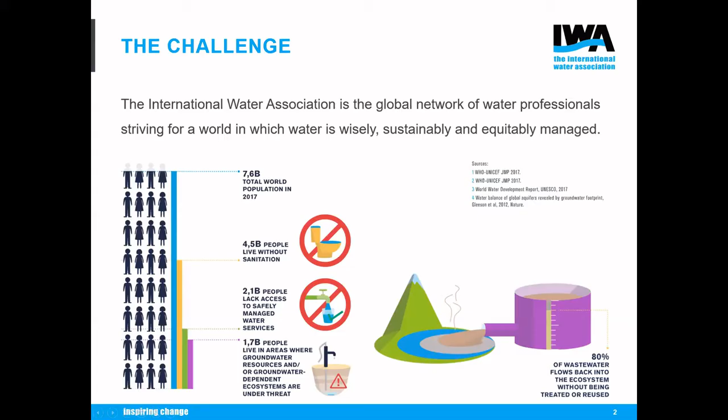Our total population is 7.6 billion. Out of that, 4.5 billion people live without sanitation, and 2.1 billion people lack safe access to water. Also, 1.7 billion people live in areas where groundwater resources are under threat. Almost 80% of the wastewater flows back into the ecosystem without being treated or reused.

That means we are polluting ourselves. So this is one thing that we all have to raise to the occasion and start doing something for water, especially the young people who are here. Please try to volunteer and join the IWA, then try to do something good with the international community.

The International Water Association is, I would say, a global water community that provides experience and leadership in transitioning to sustainable water solutions, and supports the global community to pursue sustainable development goals.

There are 17 sustainable development goals we have to achieve by 2030. In fact, IWA is a catalyst for innovation, knowledge, and best practice for the sector, external organizations, and opinion leaders. It is an international reference and source of knowledge for sustainable solutions.

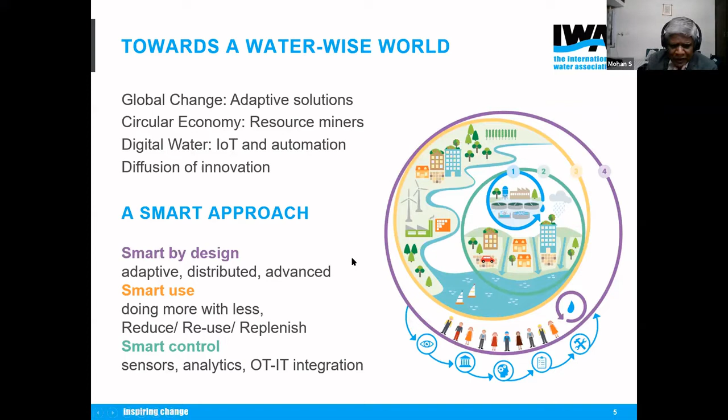So it is more about empowering water professionals to become agents of change. Engage with thought water leaders - that's the first kind of benefit any member will get. So you can connect to any water leader who is there.

There is a system called IWA Connect. If you become a member, automatically you will be connected to all the experts. Network and exchange expertise at IWA events, get the latest advancement in the water sector, guide professional development, and be part of a global like-minded community.

So that way, our slogan comes as start, engage, contribute, and lead. So you can become a member - start, then engage yourself in various activities and contribute to water management, and sometimes you may lead a particular thing.

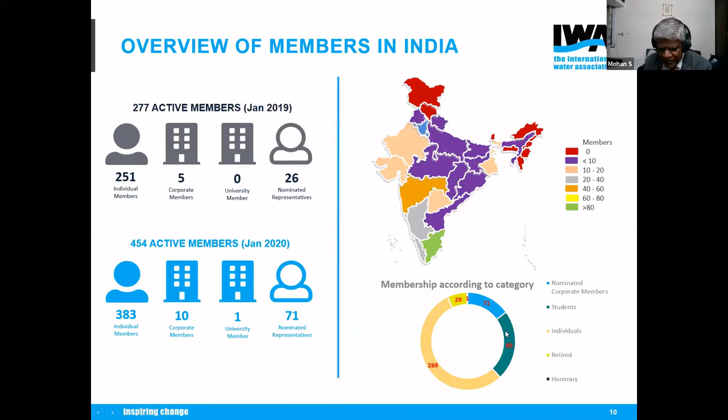This is an overview of members - some states have very good membership, some have very less. So those who are in other parts of the country should become a little more active and become members as such. There are many ways you can become a member.

The university itself, and corporates, can become members. L&T is a member, CMWSSB is a member, and so on. So we have headquarters, an executive committee, and specialized subcommittees also available.

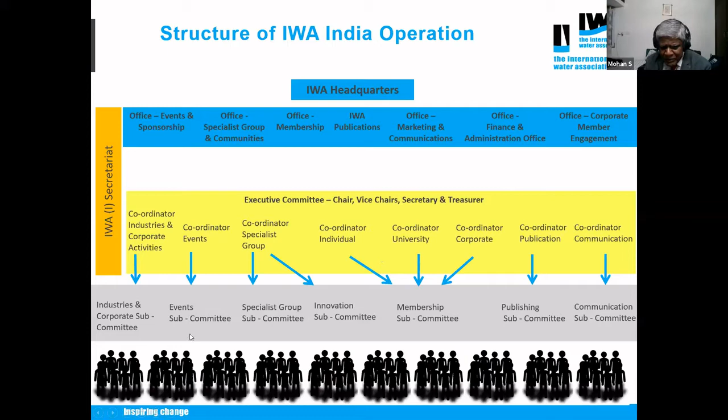So the IWA activities in India, we have a good conference in Coimbatore. Ponram has organized it, mainly on solid waste management by CSE, reimagining water use plan with IFAT, and a thematic session on digitalization. Terry madam is here, and we have also entered into some MOUs.

As on date, we have participation at different conferences, and also we have started the webinar, with more than 240 participants. The recent WDCE Water and Development Congress and Exhibition had more than 240 participants from India.

This was held in Sri Lanka, especially in Colombo, with two major sponsors, L&T and WABAG, and institutional participation from Bangladesh delegation, Nepal, and the Danish embassy. It was a very good event.

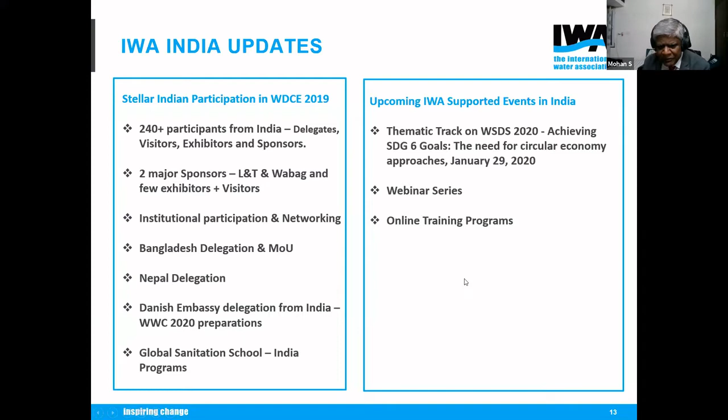We are also getting into 2020, now changed to 2021, with a webinar series and online training programs. So our main plan is membership growth.

It is not the number that we are looking at. We want everyone to join and then contribute on their own. We are only facilitating, so try to join. It is not that somebody gives you work; you yourself take initiative after joining, and automatically you can do that.

Encourage YWP India chapter formulation. Mr. Charles is working on that, along with the online webinar series. Industry-university internship opportunity is what we are trying now, and British High Commission collaboration on the water sector.

There are websites available for those who want to join. Especially I would request IWA Connect and IWA Network, IWA Publishing. There are many journals, and the Source magazine also comes out. So if you become a member, there is a chance you get some priority on publishing, unless of course the quality is very important.

With that, I will just stop here. I don't want to take time from our Jagannathan sir, but it is our duty to tell you, just to initiate, please join. There is a lot more that you can do, especially for our country and the world, on water. It is the basic elixir of life. Thank you very much for listening.

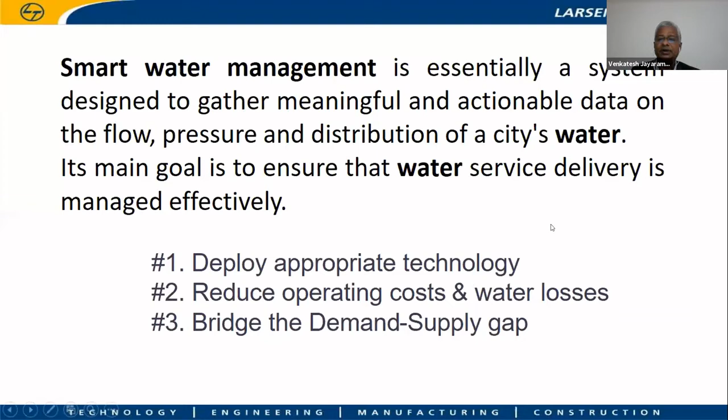So this basically has a three-pronged approach. First, deploy appropriate technology in smart water management, reduce the operating cost by increasing automation and the right kind of SCADA etc. in the system, and concurrently reduce the water losses. Finally, bridging the gap between supply and demand.

Now, if you see the presentation content, I would like to cover this in the following categories: first, a brief overview about L&T, the need for smart water management, and smart water through pressure management, leakage management, meter data management, and command and control. These are actually the methodologies, forming part of the entire gamut of smart water management. I'll be covering this in the next few slides.

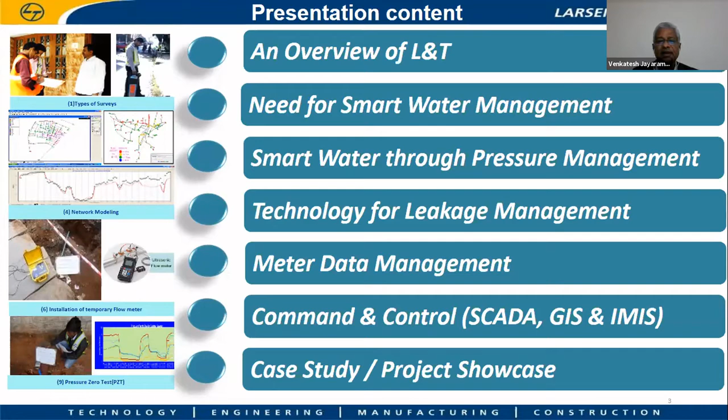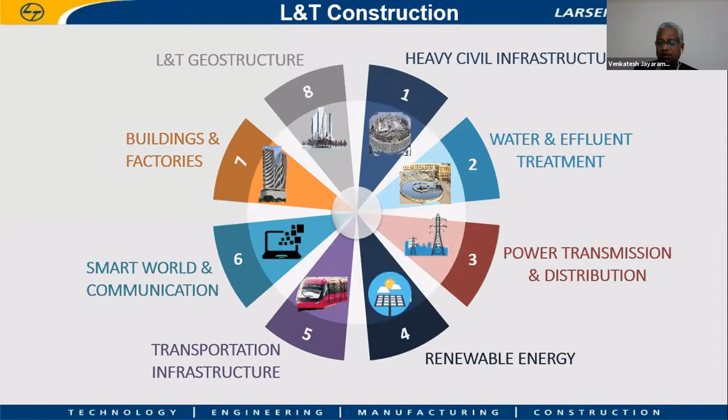This is about the further division on the water and effluent treatment IC. We have 3 major strategic business groups. Where we belong is the water and wastewater SBG, which actually executes or carries out most of these water management projects, including smart water.

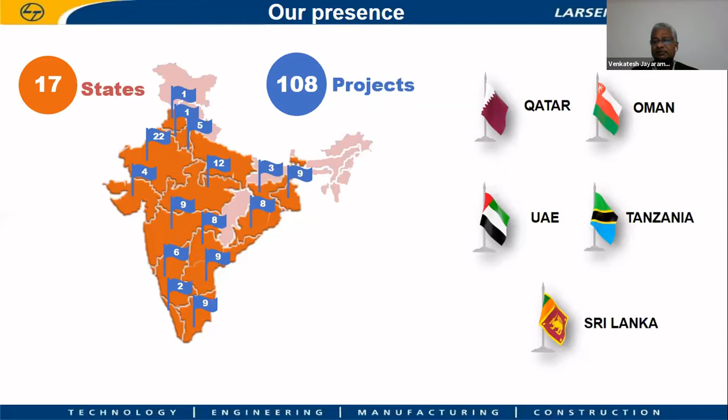One slide on our presence in various locations. We currently have about 108 projects across 17 states, and we have a presence in 5 different countries to cater to the needs of overseas markets.

I would like to specify some select references we've been working on for water management. This is the mapping of the entire component from intake to the last point of consumer metering. Currently we have the first 3 projects, Bangalore D2A, D2B, and the Delhi Jal Board project, which have been commissioned and are already completed and up and running.

The next 3 projects, Pune, Tumakuru, Hazaribagh, and Ranchi, are currently ongoing. And for the last one, we have the entire range of scope, right from intake, elevated service reservoirs, distribution, rehabilitation, giving new house service connections, then metering and billing, and also conversion from intermittent to 24/7 supply. Of course, NRW is not the least, it's the most important for any smart water management.

So out of those 3 projects, the Bangalore D2A and D2B will be presented here as one of the case studies and success stories.

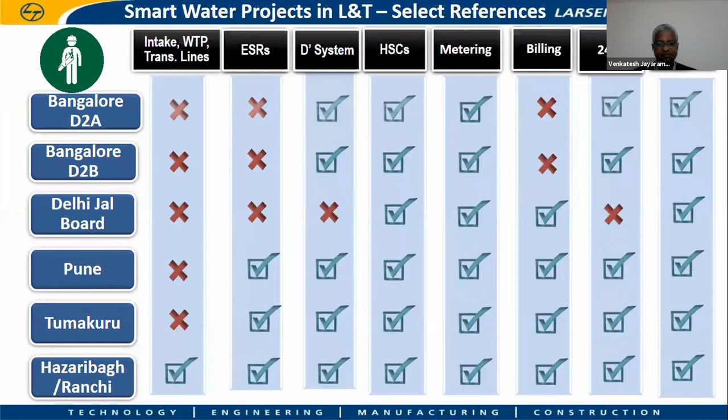The need for smart water management emanates from the fact that it's a responsibility to provide affordable, sustainable, and pure water for all. Also, this water resource is very limited and finite, and there has been exploitation of this resource in both developed and developing countries, and also an increasing gap between supply and demand.

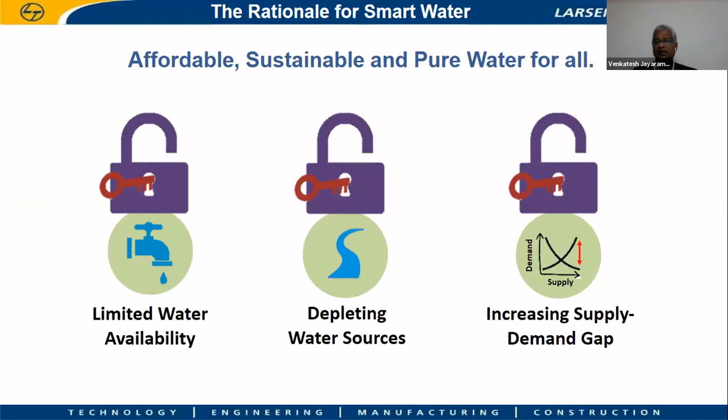If you see the current status and challenges, I'm referring to challenges in Indian conditions. I've divided this into 5 different buckets. The first, from the left, is the network part. The distribution system and networks are managed by the utilities or ULBs, urban local bodies, and most of them are done manually, with a lot of scope for interventions in automation and technology.

The second is NRW, which is a major burning issue plaguing the system. We have losses and thefts which are not benchmarked at present, and also a large quantity of water that has been lost in this particular component.

Then we also have asset management, where the data available with current utilities or whoever is managing them is not to the level desired for actually managing the system. So there is scope for improvement there also, like deploying technologies like GIS and IMIS.

The measurement component is, again, we don't have consumer metering in many cities and places at the moment. Therefore, while you can measure bulk flow meters, the consumption supplied through bulk flow meters, there isn't much scope to measure consumer metering, and therefore we are not able to assess the correct levels of NRW here.

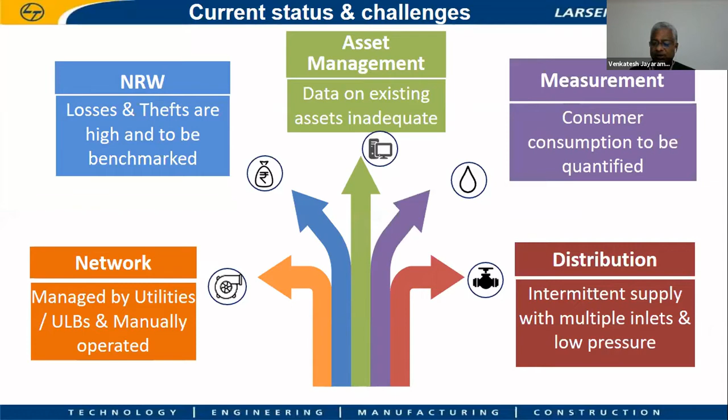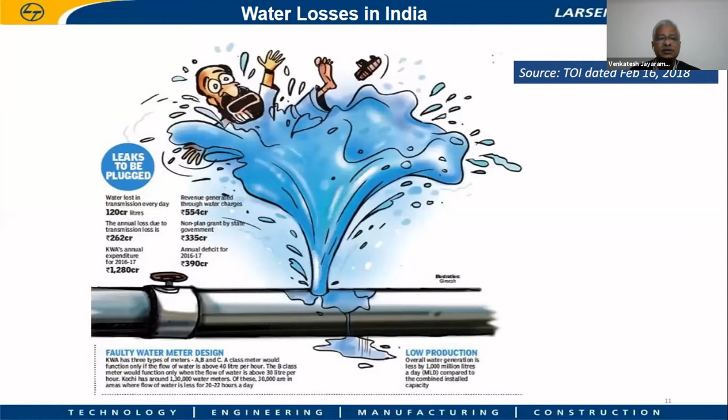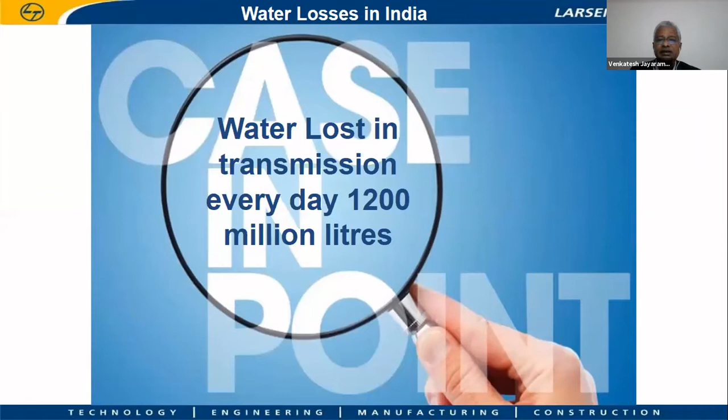An interesting statistic that I would like to share from the Times of India dated February 16, 2018. This is about the Kerala Water Authority transmission main. They have given an interesting detail about the water losses in the transmission main. This is to the tune of 1,200 million liters every day. And this, when it is converted to annual loss in the transmissions, amounts to close to around 2.62 billion Indian rupees, which is a staggering amount.

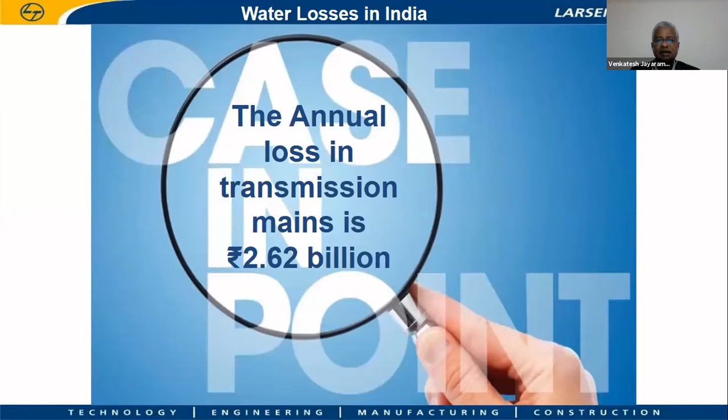And the corollary and the conclusion we can make out of this is that the annual deficit reported by the Kerala Water Authority for the year 2016-17 is to the tune of 3.9 billion. And if we manage to arrest the leakages, plug the leakages, and recover it back to the system, we would have reduced the revenue deficit by 66%, besides increased revenue by way of charging the consumers through water charges, another 5.54 billion rupees. So net, we would have made a 33% revenue increase to the utility if we plug the losses and bring it back into the system.

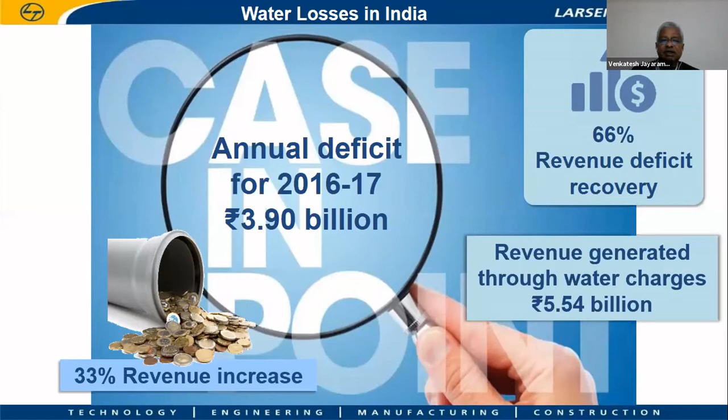When it comes to the global scenario on non-revenue water levels, there is an interesting study done by the World Bank, and this has been displayed here. Germany, Japan, South Africa, they are all well within the 10% advanced limits. But if you see India, we have a staggering 46% of losses in the system. These are physical and commercial, also apparent losses. And out of this, it is interesting to note that 32% is due to pilferage or thefts.

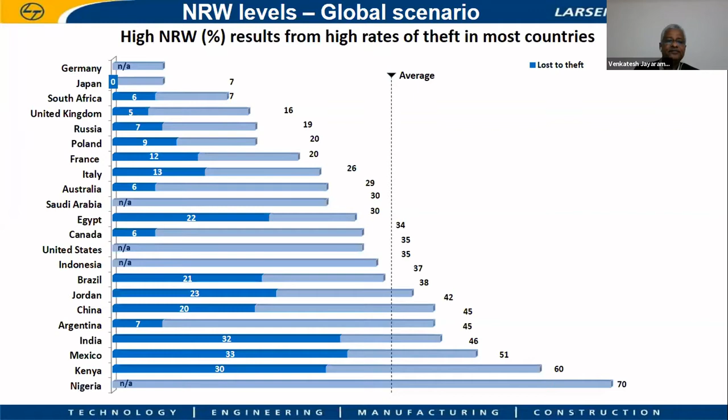And just to give a snapshot of the service level benchmarks specified by the Ministry of Urban Development, they have categorized the service levels into 7 different parameters. The first one is efficiency in collection of water charges, which has to be at 90%. 100% cost recovery from water services so that it can take care of the O&M part. 100% metering for all the connections, consumer connections and the bulk connections.

Coverage of water supply has to be 100% to all the consumers. And then non-revenue water has to be contained within 20%, which is a major challenge. And then we have the per capita supply to be given at 135 LPCD. And 100% of the water quality samples taken have to conform to BIS 10500 standards.

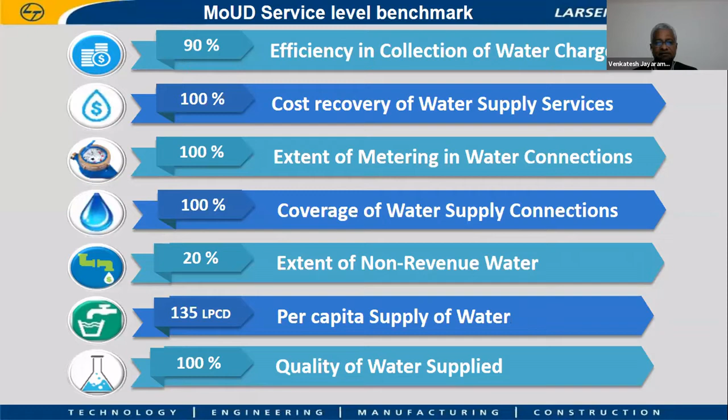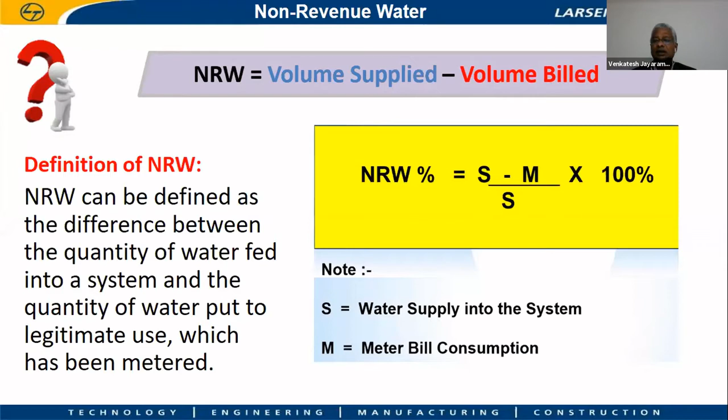Just to give an idea about non-revenue water, the definition says that it is the difference between the quantity of water supplied vis-a-vis the quantity of water consumed. And the percentage of NRW is calculated by this formula, and it is measured as a percentage of the whole.

Here again, I just wanted to touch upon some of the salient aspects of non-revenue water, at what points of the value chain of the water supply system it is disseminated. It starts right from the treatment works to the last point of billing. In treatment, again, there are losses in the system, in the filter beds, in the flocculators and all these components inside the water treatment.

And along the raw water and clear water transmission system from treatment to the service storage reservoirs, you again have illegal tapping, unrecorded users, and also losses in the transmission main, which are not so much as compared to the distribution system. The distribution system is the main part where you find much of the losses happening. You have many components, mains, HSC joints, then you have leaky valves and the likes of that.

And again, in the metering, you have losses due to errors in the meter reading, tampering of meters, illegal connections, faulty meters, and also bypass to meters. I'll be showing some of the pictures that we have taken during some of our projects that we've been implementing, and that would actually throw some eye openers on the quantum of water that has been lost due to this aspect. And of course, the last point is on the billing, where administrative errors, data computational errors, and loss of records also contribute to non-revenue water.

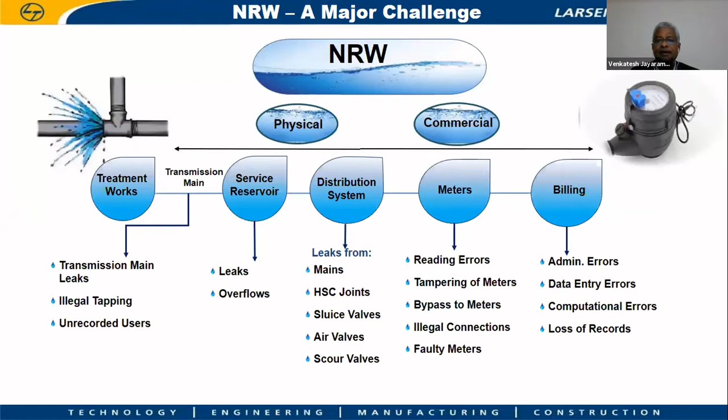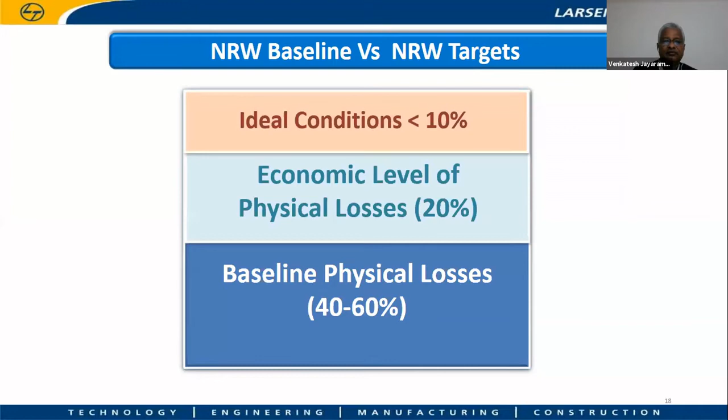NRW baseline versus targets. If you see the baseline physical losses, we would like to have it at economic levels of 20% as defined by MOUD. But where we would like to be, at ideal conditions, would be at less than 10%. But for this, we need to deploy a lot of technology, a lot of instrumentation at the projects, at the utility, to bring it down to this level. So if the cost becomes a little prohibitive, then for Indian conditions, we would like to have it at 20% physical losses.

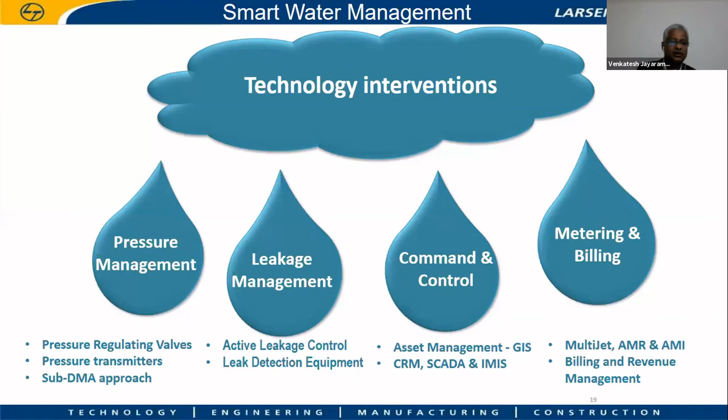Now, technology interventions are something that contributes to smart water management. Without technology, there is of course decision making and all the support systems, but technology is a main driver where smart water management is made effective and efficient at the ground level. Out of our experience in L&T and many of the projects that I've handled, there are four main components: pressure management, leakage management, command and control, and metering and billing. If all four are holistically approached, this helps in bringing down the losses or deficiencies in the system and contributes to smart water. I'll be dwelling upon each of these in the next few slides, so I'm not describing the text mentioned at the bottom.

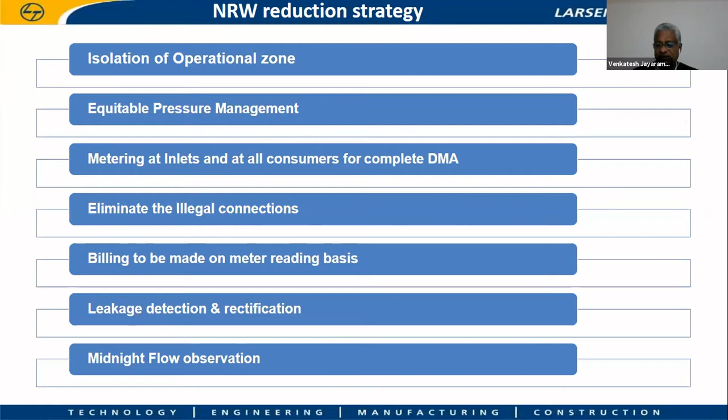The first one is on equitable pressure management. The main thing about pressure management is using the right kind of sensors, pressure transmitters at critical measuring points. Typically, these are anywhere between 3 to 8 or 10 points within the DMA. If this is not there, it becomes difficult for us to manage the pressure. One has to be at the outlet of the elevated storage reservoir, one at the farthest point of the DMA, and one at the highest elevation point in the DMA. Besides this, we can have the luxury of many more, depending on the budget available and the permissions given inside the system.

The second one is on pressure management. These are typically done using PRVs. There are two types of PRVs here: one is hydraulic, the second one is electronic. With hydraulic PRVs, we have set points at the inlet and outlet of the valve, and using this system we'll be able to control the pressure downstream. There is also a concept of pressure on demand. Based on the demand of the consumer at that particular sub-DMA or street where the pressure has to be managed, we can set the demand pressure levels for that given demand and then manage that.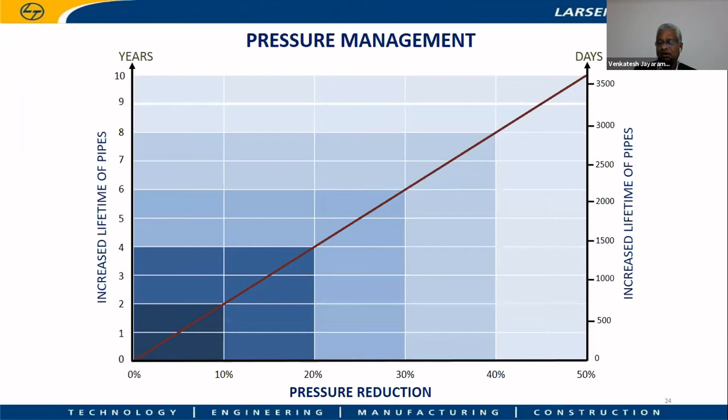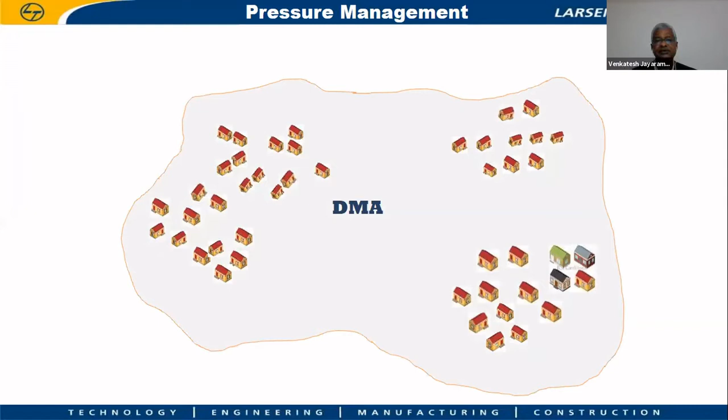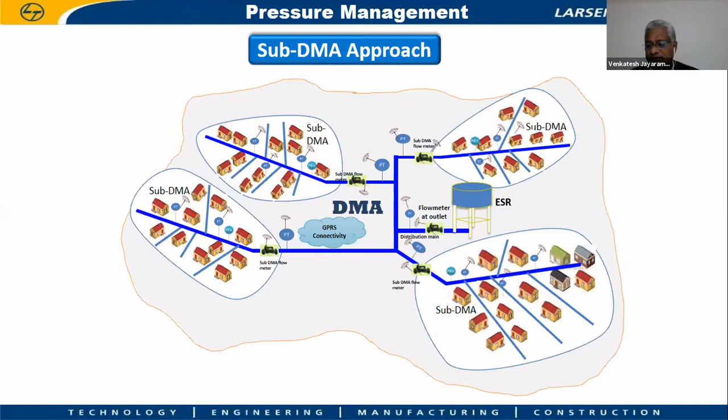The next one is on pressure management using the DMA concept. We all know that DMA is helping us in understanding the system better, where the losses are, and managing the system more efficiently. But if there is a sub-DMA concept with more pressure sensors within the sub-DMAs, it becomes easier to handle, because we are breaking it down into smaller components and managing it more easily and effectively. Of course, there are more sensors to be deployed here, and we can look at each of these on a case-to-case basis for our projects.

Then leakage management is the second one. Just to give a brief on the procedure for leakage management that we've been adopting at L&T. We have DMAs that are typically, as per the norms established by IWA, anywhere between 1,000 to 2,500 connections, also depending on the topography of the area. We do a condition assessment of the pipelines to ensure that the joints are all intact, or how bad or good the joints are. Plus, we also do a vulnerability analysis to map the hotspots and make a template for pipe replacements.

The next one would be installing the required bulk flow meters and consumer meters, because we have to measure the entire volume flowing into the system and the volume that has been consumed. Then installing pressure sensors at critical measuring points to manage the pressure and also see if there are any discrepancies with respect to the designs, the ideal conditions that we have from the hydraulic model.

Then we have the minimum night flow, which is done if there is a continuous flow, but if there's intermittent flow, this has to be looked into again. Using that, we calculate the net night flow. If the night flow is higher than the permissible levels, then we do a step test, pinpoint the leakages, and finally we rectify the leakage.

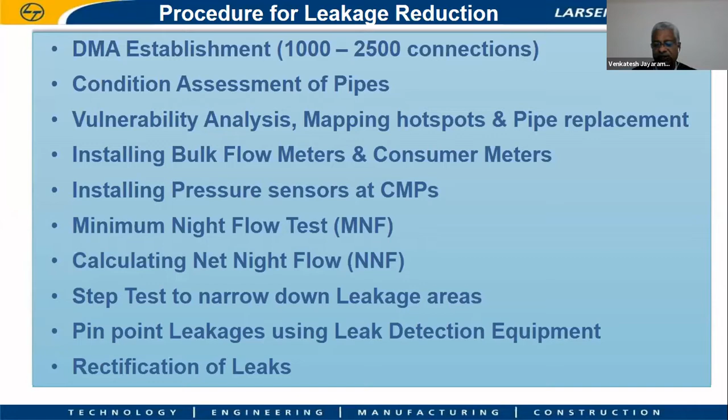The next aspect is the condition assessment of existing pipelines, because this contributes to leakages a lot. We have some technologies that we have explored, and currently some of them are under pilot POCs in a couple of our projects. Pressure transient analysis can be done. This is typically done upstream and downstream of the valve, because when you close and open the valve, a transient wave is generated across the pipeline downstream, and this can help in assessing the condition of the pipe. If there is any change in the signature of the pressure transient waves, we'll be able to assess that something unusual is happening downstream.

Then we have the images, the inline robotics, the smart ball, and some of the crawlers that go into the system. It's basically camera based, it generates images, and we can monitor the C value or the leakages or the damages inside the pipeline. But this again has its own limitation, because it goes through a cable inside the pipeline, and the diameter also poses a problem. We have seen that this cannot be deployed to pipelines which are less than 200 mm in diameter. So for larger diameter pipelines this can be deployed, but the constraint is on the smaller ones, which are the majority in most of our distribution systems.

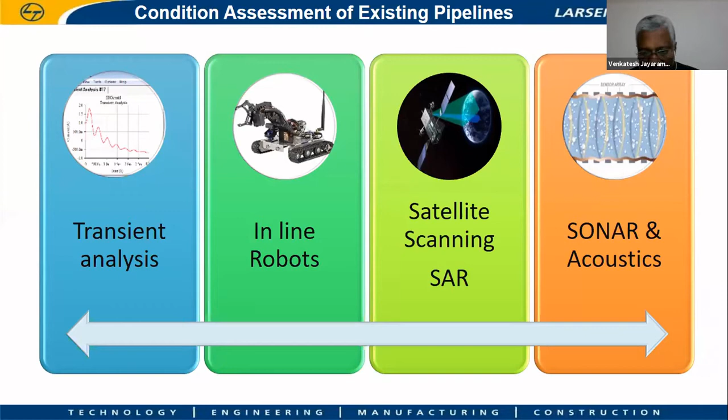The last one is acoustic, which I'll be talking about in the next slide. Then we also have the other associated pipelines, cables, sewer lines, optic fiber cables, gas lines underground. And for detecting this, we have something called the ground penetrating radar. This is also used in many of the projects, but the limitation of this is that it can only detect the metallic objects and not the ones which are non-metallic, like HDPE, or if it is PVC pipelines, it becomes difficult to locate this.

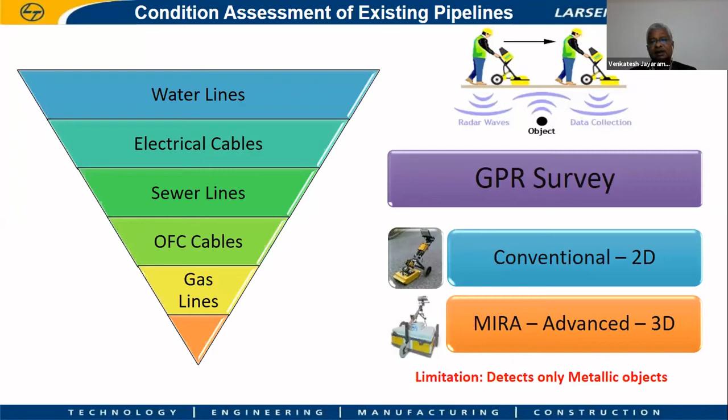Leakage detection, again, just wanted to give a small idea about how this is done. This methodology is a time-tested and proven one. It is called the minimum night flow test, and done anywhere between midnight 12 or 1 a.m. to morning 4 a.m., where there is no consumption of water at the consumer level. The minimum night flow is calculated by observing the flow at the outlet of the ESRs, and also at all the consumer locations.

By that we'll be able to arrive at what is called the net night flow by deducting the legitimate night flow. There is a value given for this in IWA: so much flow is allowable, permissible at that period, so much leakage is allowed per kilometer of pipeline. Using that, we calculate the net night flow, and if the night flow is pretty high, beyond the permissible levels, then we go into what is called the step test to isolate the zones, subzones where the leakages are high.

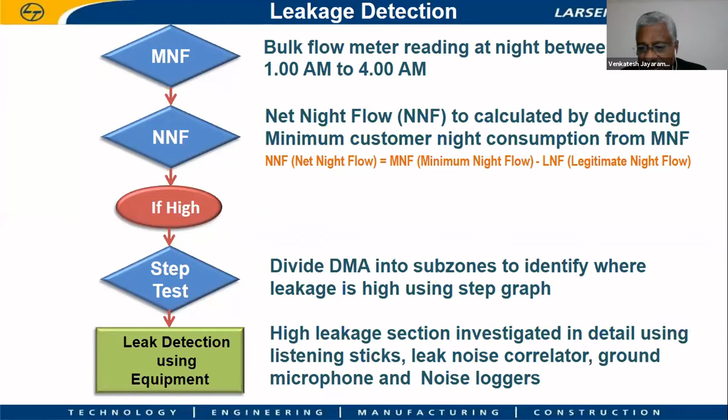This is basically done by closing the valves one by one and then observing the pressure and the flow parameters. If the pressure and flow is drastically different, it comes down immediately, we know that there is something abnormal happening in that particular subzone, and then we identify that using leakage detection equipment, and then rectify the leakages.

So just one slide about some of the instruments or the technology that is available for leakage detection. We have the noise correlators, which are used to compare the acoustic noise at two different places in the pipeline, and using that, we'll be able to identify the leakages. Then we also have the portable clamp-on flow meters, where through the ultrasonic pulse velocity technique, we'll be able to measure the flow and then identify the leakages.

We also have the listening stick and mechanical devices, which are deployed in many of our projects. We have in fact done the training for the technicians and the persons there, and they are trained in using these equipments. This is time tested and quite dependable in terms of detecting leakages.

The last one is an expensive method. We have to permanently deploy the noise loggers at different locations in the pipeline, and this creates continuous data on the acoustics at the central control room. By doing that, if you see any variation in the acoustic data that has been sent by the noise logger, we'll be able to zero down the areas where the leakage is likely to happen.

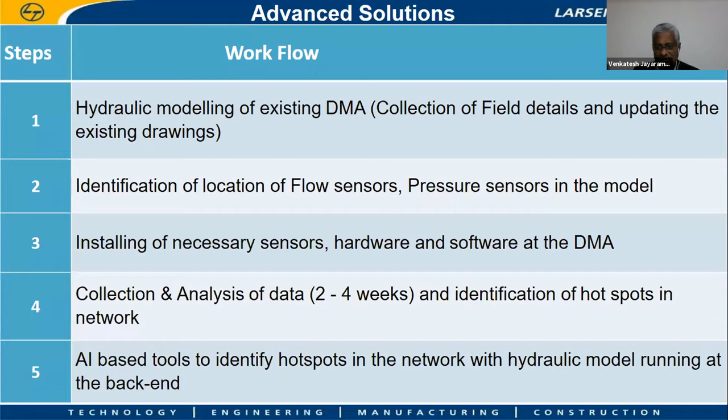Then we superimpose that on the hydraulic model and see where the variations and discrepancies are, and if there is any abnormal behavior with respect to the ideal conditions of the design vis-a-vis what is actually happening on the ground, we might know that those areas are prone to leakages. So these are some of the techniques that we also have.

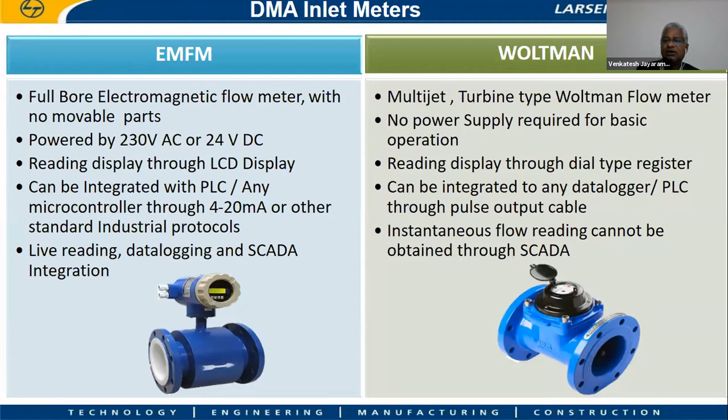The third one is on meter data management. We have basically two types of flow meters, the electromagnetic flow meters and the Woltman flow meters. EMF is being deployed in many of the projects, it is more dependable, and it can directly send the data to the SCADA, so integration becomes easy. Woltman is a little less expensive, though it has its own drawbacks because it hasn't got that electronic component. Then consumer metering.

Earlier we had flat rate tariffs, consumptions not quantified, billing not justified. All these because of unmetered policies. Now, slowly we have moved on to multi-jet meters, where reading is manual. Mostly it is also monthly or bi-monthly, time-consuming.

And then from here, we are also moving to an era of AMR meters. We are propagating this, or we're trying to build this in many of the projects. And this is, of course, a little costly, but it comes with many advantages. Your data generated is accurate, and there is also less human intervention in this. So therefore, it becomes more dependable.

The last point is on the AMI meters, where most of the developed countries have this system. And this is a real-time data management system where the data generated from the meters are transmitted almost on a daily or hourly basis. And this is very helpful to generate analytics out of it and meaningful interpretation out of that.

Also, the advantage is that we can actually fix the system, the repairs quickly without the water being lost for a month. In other cases, we will actually be able to identify the leakages at the end of the billing cycle, maybe a month or so. But here you can do it instantaneously, and therefore the water that is saved through this can be enormous, with a lot of benefits out of that.

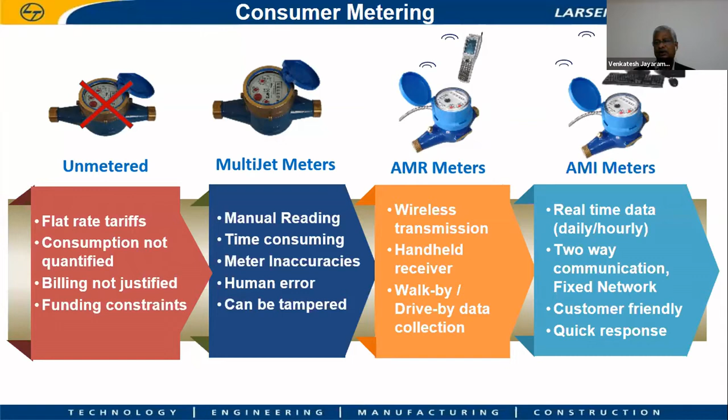And we have actually deployed this AMI technology in one of our projects for one of our DMAs as a proof of concept. Our partners have actually deployed this, and these AMI meters are generating data on an hourly basis, and the backend system, the AI tool or the software, is able to do the analytics and generate reports on what the losses are, where the hotspots are, and things like that.

And then data acquisition through AMR, just quickly, one slide on this. It is a walk-by method, manual method, or you can also have a drive-by system where the AMR meter communicates to the meter reader through RF, radio frequency. And from there, it is transmitted through GPRS or GSM to the DMA control room.

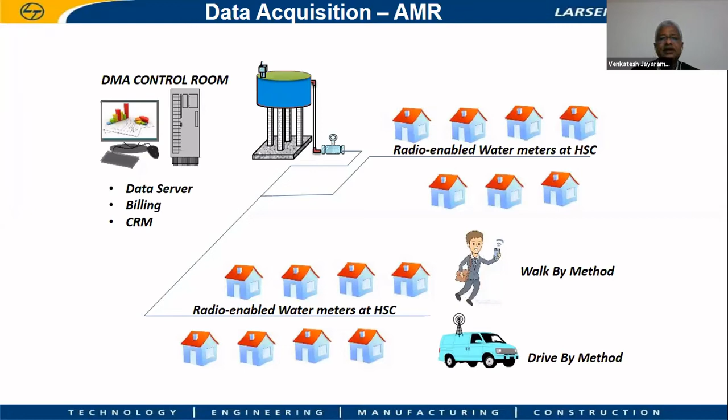The second one is on the AMI, where there are two methods possible. The first one is on the data collectors and data concentrators, where you have HSCs communicating to the data collector through RF radio frequency mode, and then from the data collector to the concentrator again on RF mode, and from the concentrator it is transmitted to the server using GPRS or GSM.

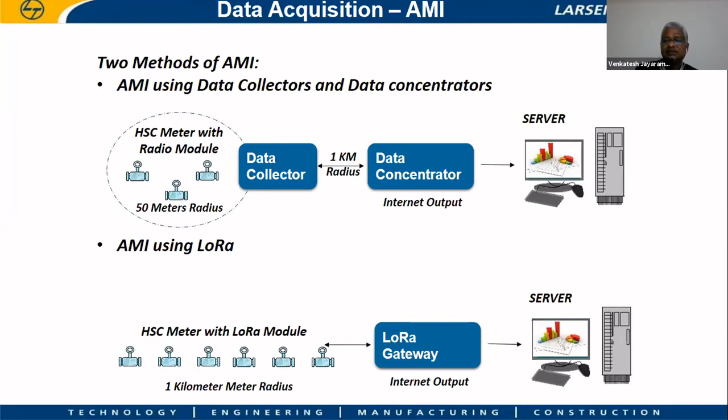And on the AMI on LoRa, what we call a low power wide area network, which is also called LPWAN, it covers a wider spectrum of HSC meters, typically anywhere between 1 kilometer to 6 kilometers, depending on the line of sight. And this typically has a very powerful modem, a gateway, where the data is connected through your specific bandwidth of RF, and then it is communicated to the server. Both the systems are actually on a real-time basis.

The last point is on this command and control using SCADA, GIS, and IMIS. So we have SCADA. I don't want to dwell much upon this because many of us know about this. And again, we have the IMIS and customer relationship management system, where it becomes user friendly, and the complaint redressal takes a shorter duration, the response time to repair the leakages, and also it can directly communicate to your web-based IMIS.

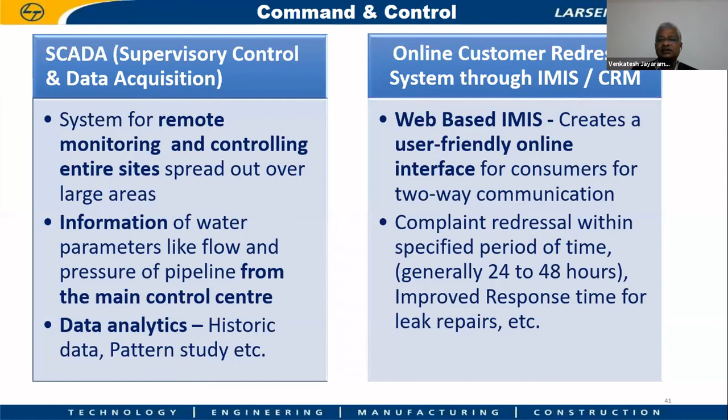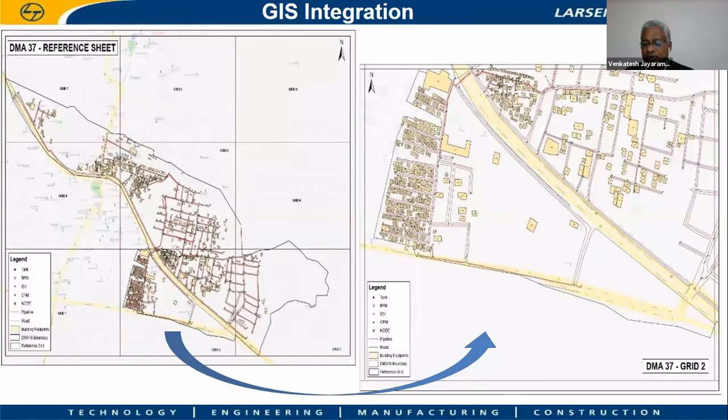GIS, again, very important for asset management, to get all your water assets, the utility data on a point, line, and polygon database. The features can be got onto shape files, and this can be exported into a geodatabase and analyzed, and also whatever new as-built or new improvements to the system can be concurrently updated. And this is one screenshot that I would like to show on the GIS platform that we have developed for one of the projects.

You can see the building footprints here. All these building footprints are generated as polygons, and the entire house or property have been mapped into GIS. Each polygon has been given one unique identity ID, and the entire database on the consumer—meter status, type of connection, consumption pattern, address, everything about the property related to water supply for billing—has been generated as a schema here, and the attributes are linked to the point database. So the layer management becomes very easy and efficient.

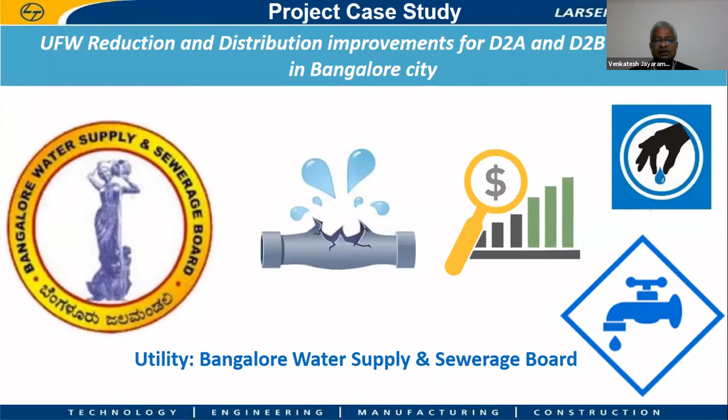Now I would like to come to the project case study. This is the UFW project which SJ sir was mentioning, for the city of Bangalore. The client was Bangalore Water Supply and Sewerage Board, under JICA funding. Here we had the component of UFW that had to be addressed—this means we had to bring down the apparent and real losses, but we had not much to do with the unbilled, authorized consumption, which is also part of non-revenue water. So there is a subtle difference. We had to address this as a UFW project and exclude the unbilled portion.

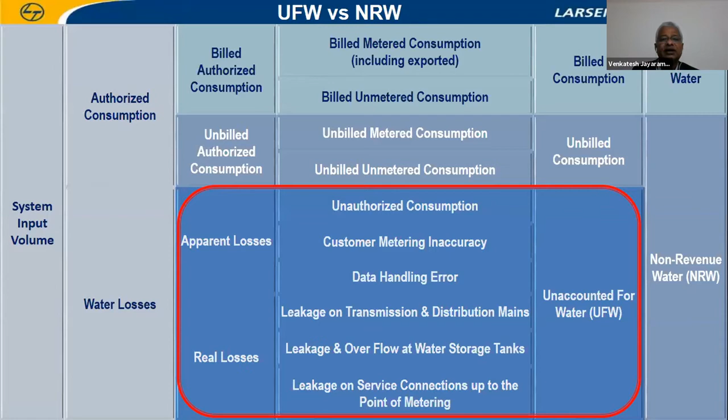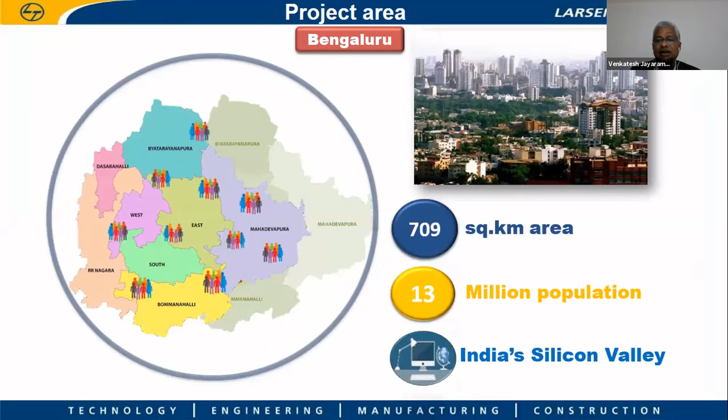Now this is the city of Bangalore. We have two zones here, totaling 709 square kilometers, serving about 13 million in population. On the water supply statistics, there are 8.6 lakh house service connections, and the entire water treatment plant capacity is around 1,350 MLD. That's currently being supplied with a staggering loss of 49%.

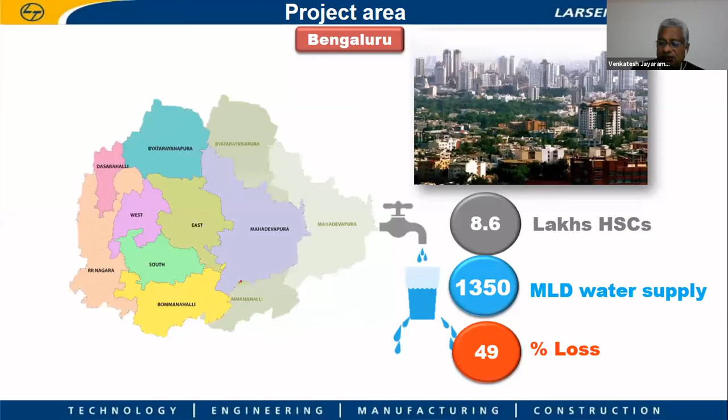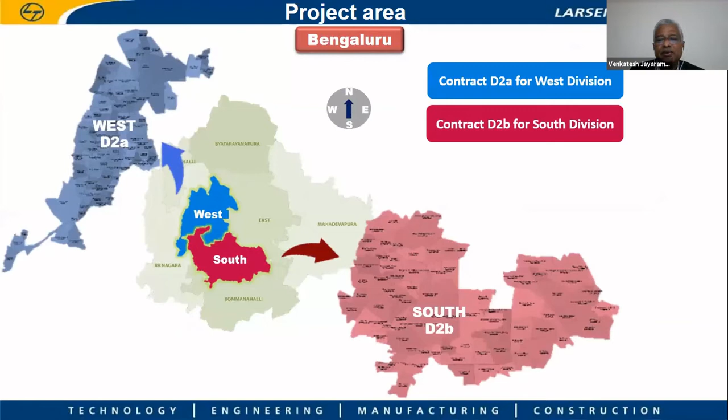These are the two areas highlighted in blue and magenta, called D2A in the west and D2B in the south. These are some of the scope we handled—54 square kilometers of area to be managed, about 170,000 house service connections each, about 1,500 kilometers of pipe network in the distribution system alone, and 83 DMAs that were formulated in this project. It started around 2012 under JICA funding, and both projects are successfully completed and are currently under operation and maintenance.

One aspect I'd like to highlight is that out of 1,510 kilometers of pipe network, by just replacing or changing about 18% of the pipeline for D2A and about 23% for D2B, we were able to bring down the losses from 49% to 22% current levels. We didn't replace the entire distribution system because JICA imposed a condition that the pipes were good and the assets had to be taken care of—we couldn't just discard them. Just by replacing all the less-than-100mm CI pipelines, we brought down the losses.

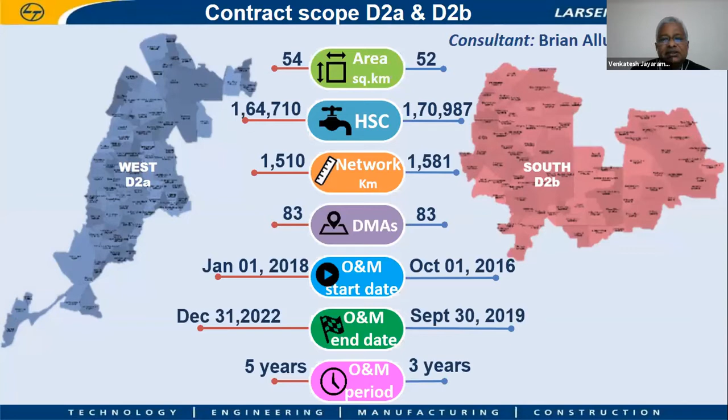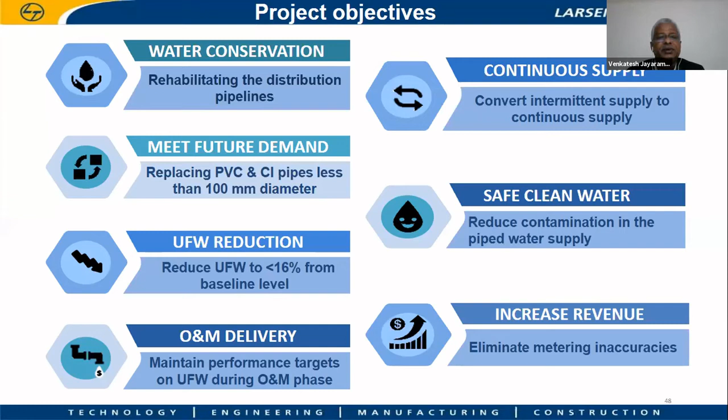Some project objectives: water conservation, continuous water supply, safe clean water, increased revenue to the urban local body—that is BWSSB—bringing down the UFW to less than 16% from the baseline level of around 49%, and meeting the future demand of the horizon period.

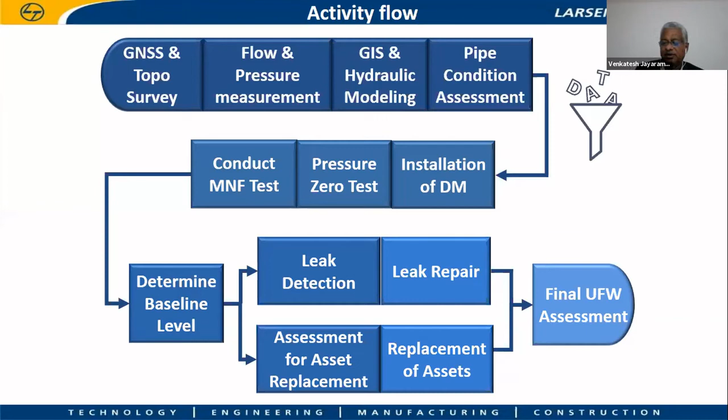Activity flow chart—I'll quickly take you through the methodology adopted for bringing down the losses. We started from a GNSS, Global Navigation Satellite System survey, followed by a topo survey to establish ground control points on elevations, contours, etc. We also did flow and pressure measurements at strategic locations, collected data, developed the GIS base map, mapped all the assets, and did hydraulic modeling through WaterGEMS. Then pipe condition assessment to understand which pipes needed to be replaced and which retained. Having collected the data, we did the bulk flow and district meter installation at boundary walls, then step test, pressure zero test, MNF test to understand where the hotspots and leakages were. Having established the baseline level, we did leakage detection and rectification through repairs, and finally brought down the UFW to less than 23%.

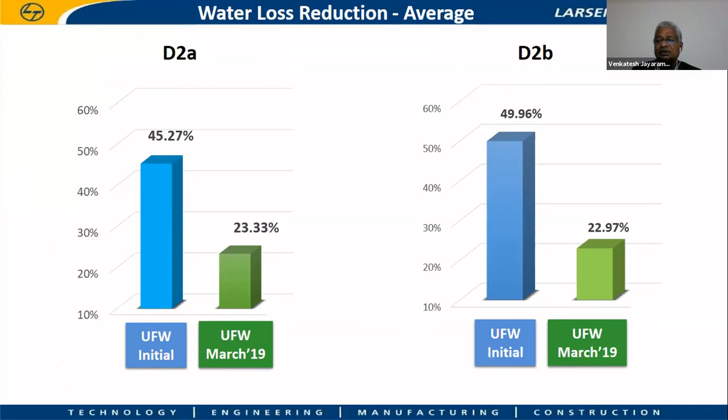Other results: D2A, we brought it down from the initial level of 45% to 23% as of March '19, and D2B we were able to bring it down from 49% in 2012 to less than 23% in March '19.

On the pressure, it's an interesting fact that unlike developed countries, there is a unique problem in Indian distribution systems: we have low pressure. In developed countries, there is continuous water supply but also the problem of high pressure levels. Here we encountered low pressures of less than 1 meter, as you see in these red spots.

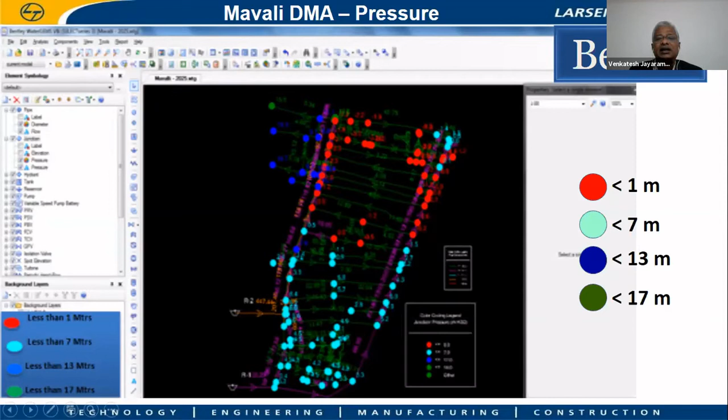This was the case when we initially modeled the DMAs prior to rehabilitation. By proper rehabilitation and deploying equitable pressure management techniques and the right kind of technology, flow meters, sensors, etc., we managed the system. Finally, after implementation and rehabilitation, we brought pressure up to 7 to 13 meters.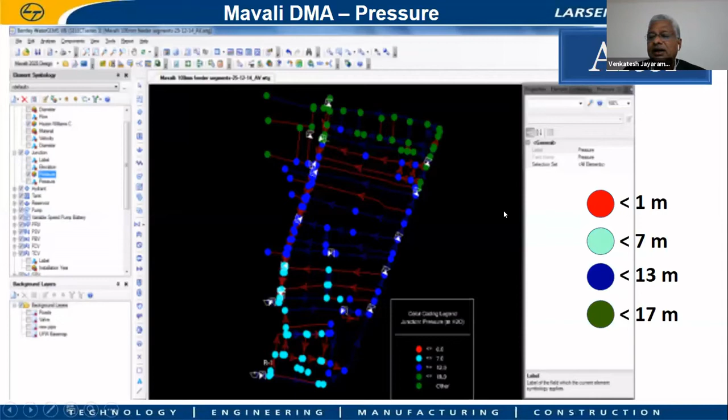So all the red spots are gone here, and people were able to get water even on the second floor of their property. That is a benefit, one of the tangible benefits we had in this project.

On UFW reduction, I just want to dwell on one aspect, the last one, Goraguntepalya, where the UFW was brought down from 66% of initial level to less than 6.6%.

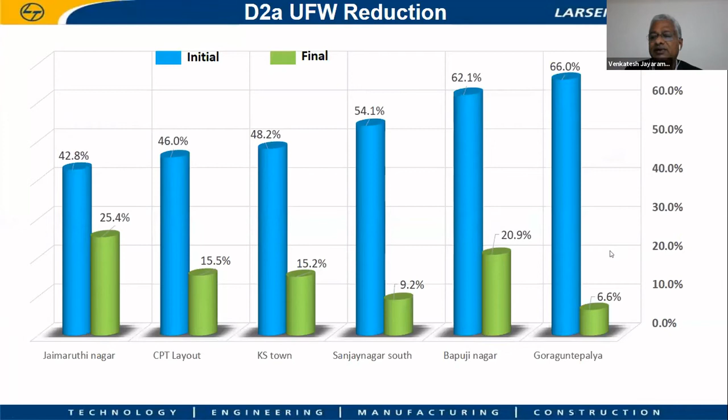Again on pressure, the ITI layout has shown the maximum improvement, from 6.2 to almost 20 meters of pressure at the residual head.

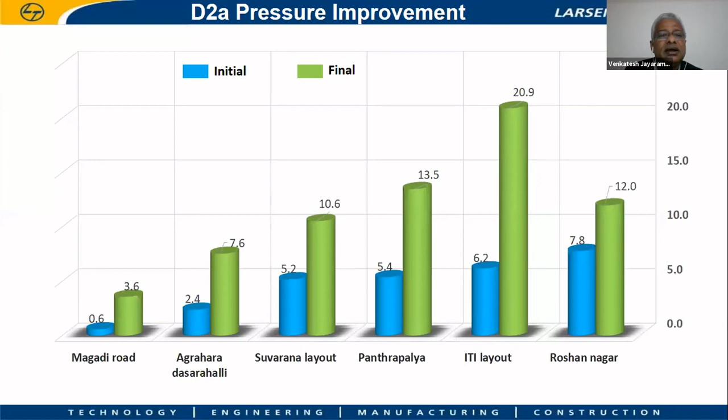Some pictures on how it looked, some components before rehabilitation - the leakages were there. It had actually existed for many years, buried, and not surfacing out. So the water losses were pretty high.

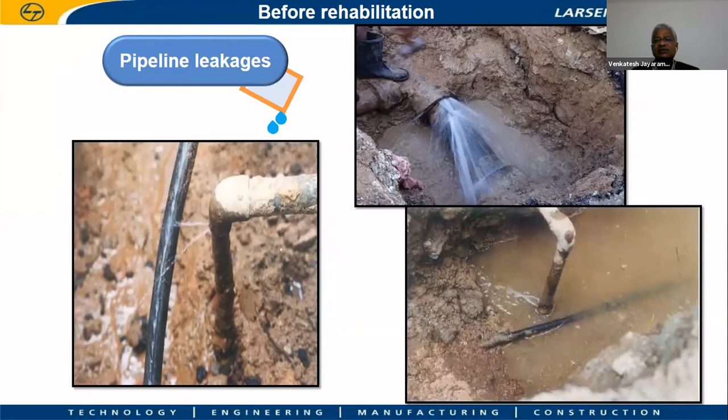This is the condition of some of the walls we had seen prior to rehabilitation. And again, some pictures on illegal connections - you can see multiple connections bypassed through the meters. This has to be addressed.

A lot of constraints and problems were encountered, and we went through this by a proper methodology for illegal connection detection. This was supported by the NGOs and also by the urban local body.

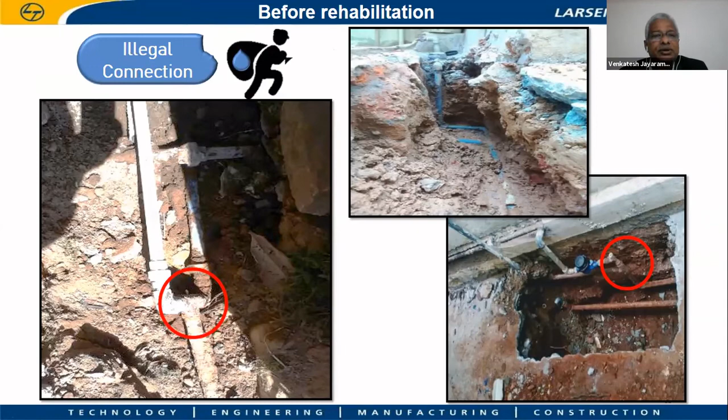Some of the key benefits, for want of time I'll quickly run through this: better service delivery, improved billing and revenue for BWSSB, adequate and equitable pressure, and better water quality to consumers. Finally, the deployment of customized technology helped bring better O&M practices for the O&M team, and also eliminated illegal connections, which were streamlined in this project.

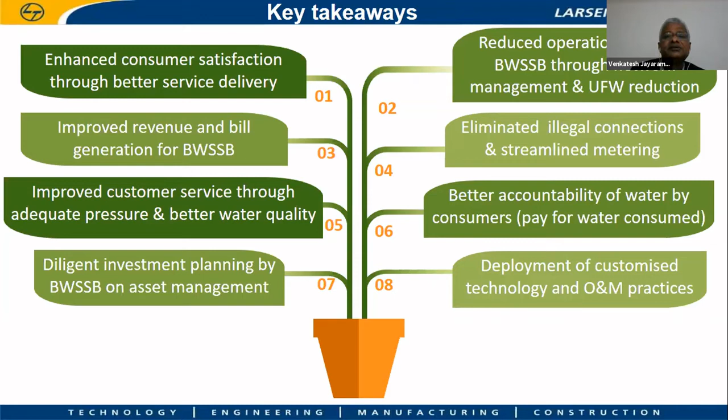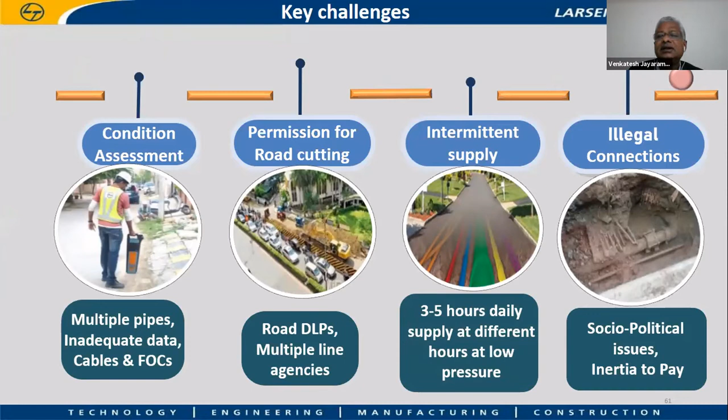Some of the challenges: condition assessment, permission for road cutting and restoration, intermittent supply since it was only for 3 to 5 hours daily, and finally illegal connections. These were key challenges we faced during the project, and they were addressed with sufficient and good support from the ULB, from the client.

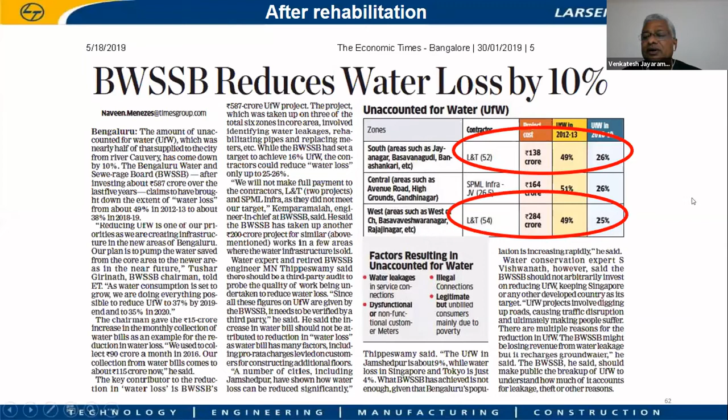Finally, this is the best testimony of what we have achieved and the benefits derived from the project. This was featured in the Economic Times dated 30th Jan 2019. You can see the two red circles: L&T reduced UFW from 49% to 26% in one DMA, and in the other DMA of West, Basaveshwar Nagar and Rajajinagar, it was brought down from 49 to 25%.

Now, as we traversed from 2012 to 2019, we have made substantial strides in digital and technology solutions. We have been working with many technology partners, many vendors, and exploring some of the best practices being done elsewhere in the world.

We have been looking at pressure transient analysis - I'm being brand agnostic here, this is more focused on the technology - your pipe renewal planner. We have also used solutions for water network management by analyzing pressure, flow, and noise, and deploying robotics, small crawlers and similar devices inside the pipe to assess conditions.

So currently some of these are in pilot stage. We have deployed them, and we are testing them, and the results are tangible. We hope to take it forward to many other projects and expand it and scale it up at the project level.

Another most important initiative is the information, education, and communication quadruple P initiative. This is something my SBC head has been spearheading, and he's been a very strong advocate of NEER, which has been his brainchild. It is not just about people, planet, and purpose. Profit also matters, but it goes to show that L&T has given a lot of emphasis on these other aspects to make the consumers aware and make the project more successful.

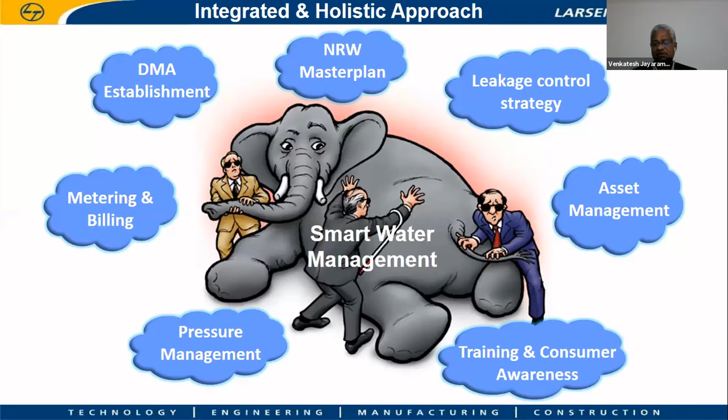The last aspect is the integrated and holistic approach required for smart water management. It is not possible if smart water management is looked at in a silo. We have to have these 7 components integrated into the system: the NRW master plan, leakage control, asset management through GIS, IEC activities, equitable pressure management, metering and billing to properly assess consumption and supply, and finally DMA establishment to understand how the system behaves and make it more manageable. This has to be an integrated approach; if addressed in isolation, we might not achieve success in any of our objectives for smart water.

Just some food for thought: average water demand, assuming 800 MLD to be supplied for each city, comes to the tune of 8,000 MLD. Assuming 40% water losses, it is a staggering 3,000 to 3,200 MLD water lost as NRW. If we had to recover these losses, we could actually cater to a population of almost 4 crore, which is sizable, and the benefits could be enormous in terms of improving service delivery levels in the country.

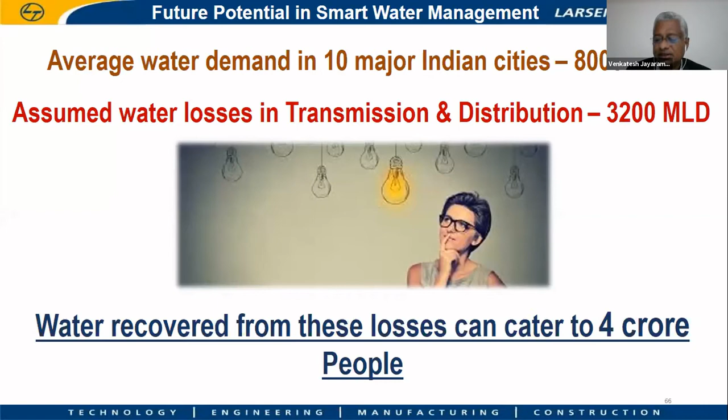Thank you so much for the patient listening. I hope it was informative.

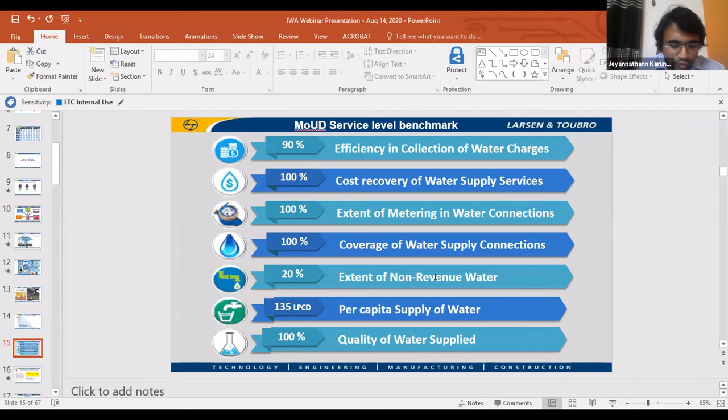Thank you, sir. The last question is from Mr. Manish Mishra. How does L&T deal with water meter tampering? Are there any strategies adopted? It's a very practical question. Sir, actually, I think we don't have any kind of vigilance mechanism or people who are monitoring where leakages or thefts are happening. SJ sir, could you throw some more light on this, on the Bangalore experience?

Yeah, Jain is right that tampering is happening. You know, intelligent people are available in society. So generally this tampering takes place, but wherever we are maintaining the scheme, we are detecting that tampering, replacing it, identifying it, and then discussing with the government and setting that right. This tampering is happening, I do agree.

The first question I want to answer a little more deeply, sir. Somebody asked a good question whether CPHEEO allows 15%. Yes, rightly, because CPHEEO might be allowing it since it depends on the pipe material you are using and the workmanship. In India, 50 years back they used to use asbestos pipe, AC pipe. Asbestos pipes generally start leaking from day one when you lay the pipe because it is fragile.

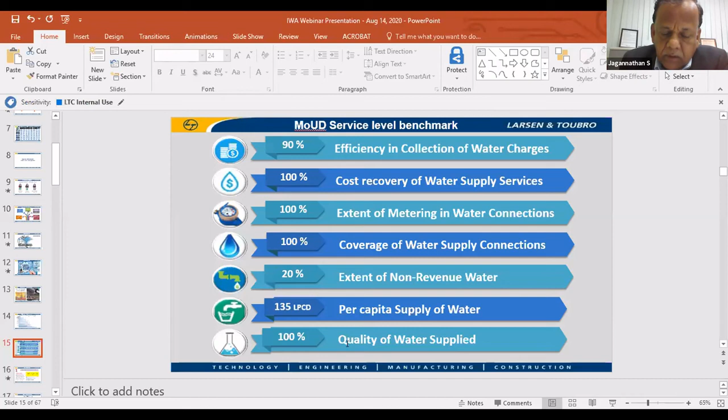And then they use the rubber joint. It will not go beyond 10 kg pressure or 5 kg pressure; it will not withstand that. So now better pipe materials are available, wherever good specifications are there. The first day itself, when you do the hydro test, whatever project L&T executes, there won't be any leakage; zero leakage to that level we are showing to the government engineers.

And then slowly, as time passes over 1 to 5 years, it deteriorates and moves to the 15% stage by the 5-year stage. Otherwise, on the first day, whenever you bring a new system with new pipe, it is with zero loss.